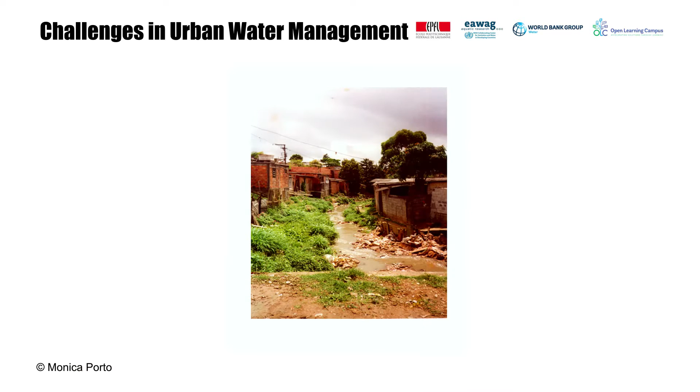Economic development and rapid urbanization dramatically increase the demand for water for municipal, domestic, industrial, agricultural, energy, environment, and recreational uses. Water pollution is increasing in developing countries' cities due to rapid changes in land use patterns, inadequate wastewater collection and treatment, poor solid waste and stormwater management, and aging infrastructure.

Climate change imposes additional stress on urban water sources due to increased variability and uncertainty of both floods and droughts. Traditional approaches to urban water investments are often fragmented and frequently unsustainable since they generally do not take into consideration the multiple dimensions and cross-cutting issues of urban water management.

Integrated urban water management, or IUWM, is a flexible, participatory, and iterative process which integrates the elements of the urban water cycle, such as water supply, sanitation, stormwater management, and solid waste management, within the context of a city's land use, urban development, and river basin management, in order to maximize economic, social, and environmental benefits.

IUWM offers a holistic way of undertaking strategic planning by considering the management of competing water uses at the level of the watershed, while recognizing the needs of the city as well as those upstream and downstream users.

IUWM takes into account the needs of all users within the basin, while working across vertical and horizontal administrative boundaries in order to overcome the traditional fragmentation of the urban water cycle, as well as to allow the consideration and integration of interdependent sectors, both urban and related sectors shown in green, and the different water subsectors shown in blue.

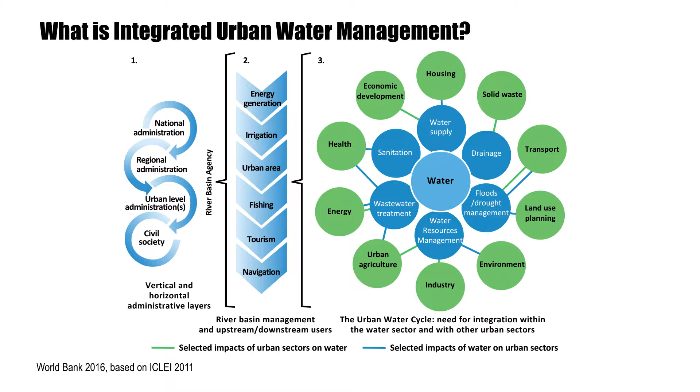International experience shows that the transition to an integrated urban water management approach is an incremental process triggered by one or several drivers that could be social, such as population growth and rapid urbanization, economic, for instance, when there is an urgent need for livable space, or environmental, such as water quality issues, water scarcity, or extreme climate events.

Cities in developed countries have transitioned through these phases, motivated by social-political drivers. Fast-growing cities in developing economies could leapfrog some or all of these earlier phases so that they can become water-sensitive cities more quickly, thus avoiding the mistakes that developed cities made while following this path.

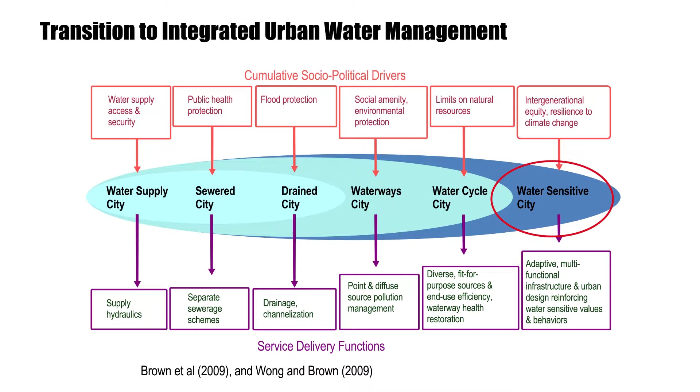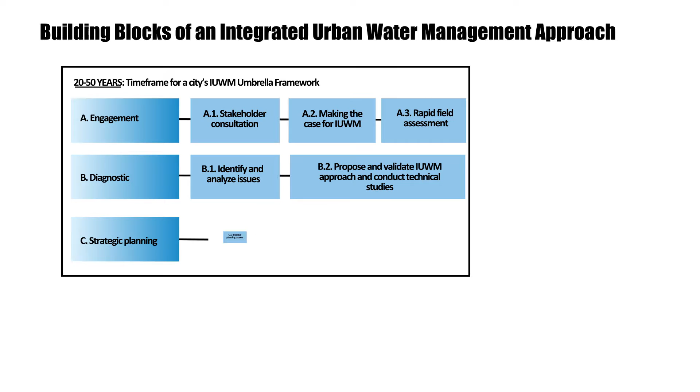We will now present practical guidance on building blocks and potential activities that may be considered when engaging with a city under an integrated urban water management approach. The activities listed are to be taken as general guidance, as their application in each case will vary depending on local conditions and drivers, as well as on the city's experience in applying an integrated approach, the level of interest of its key stakeholders, and their capacity.

Assessments undertaken using an integrated urban water management framework should include the evaluation of urban and water investments over a longer-term period of 20 to 50 years. In line with this long-term strategic planning, specific investment projects and programs can be designed and implemented that may deal with a smaller number of complementary urban and water interventions.

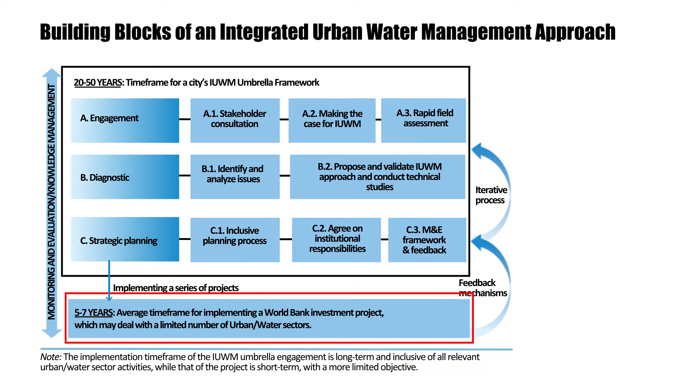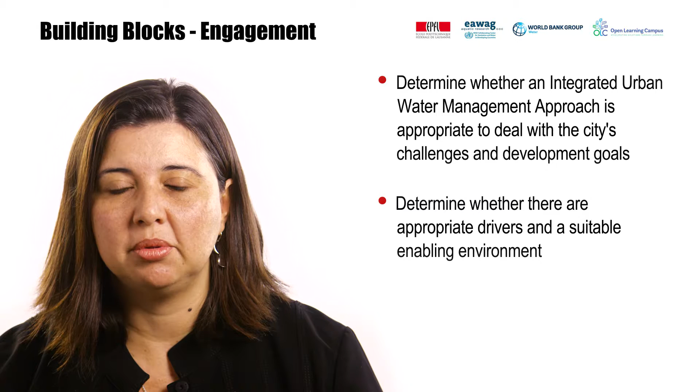The main objectives of the engagement phase are to determine whether an integrated urban water management approach is appropriate to deal with the city's challenges and development goals, and to determine whether there are appropriate drivers and a suitable enabling environment for embarking upon an integrated urban water management planning process.

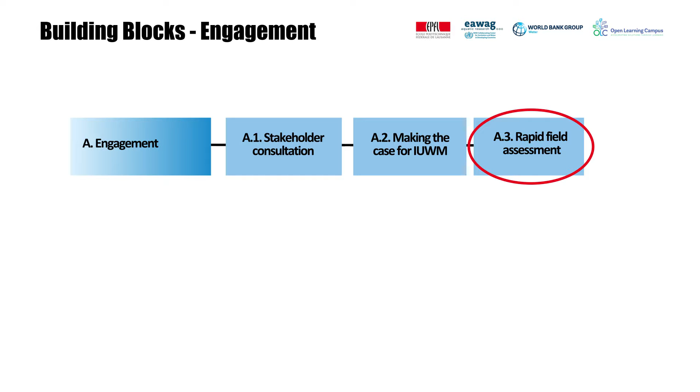Making the case for integrated urban water management with the identified stakeholders, and undertaking a rapid field assessment of the urban and water challenges in the city in order to refine the desk review analysis with the stakeholders to gain a better understanding of the water challenges the city faces and the processes and systems in place to deal with them.

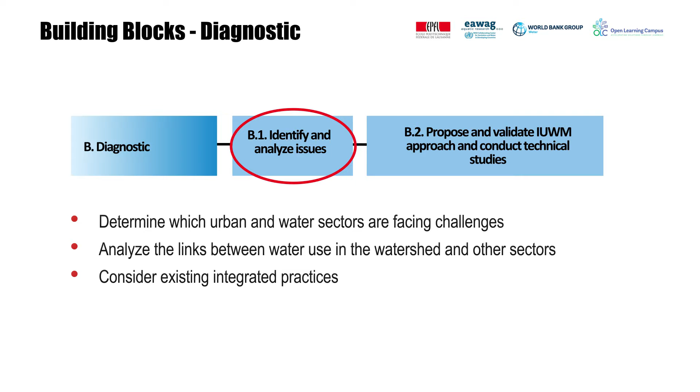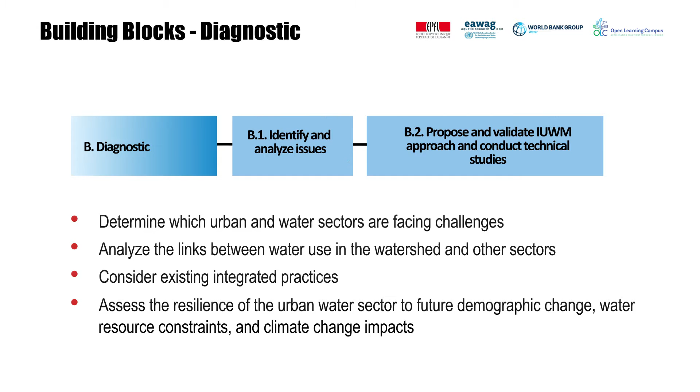Based on the data gathered and the stakeholder consultation carried out during the previous phase, the main objectives of the diagnostic phase are to determine which challenges urban and water sectors are facing or will face, analyze the links between water use in the watershed and other sectors, including those listed here, consider existing integrated practices or lack thereof, and assess the resilience of the urban water sector to future demographic change, water resource constraints, and climate change impacts. It is important to look not only at the data, but also at the modus operandi of the involved institutions.

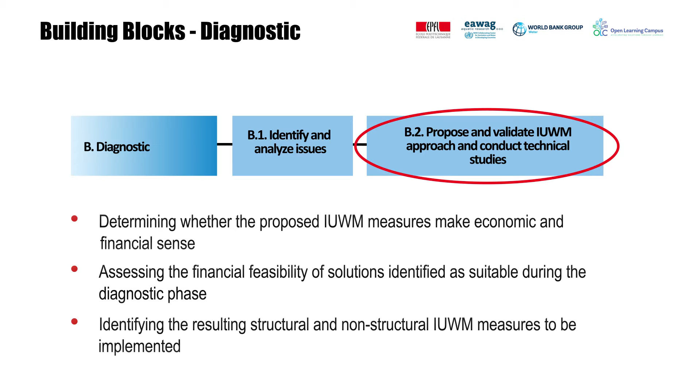Technical studies should be carried out next with the objective of determining whether the proposed IUWM measures make economic and financial sense, assessing the financial feasibility of solutions identified as suitable during the diagnostic phase, and identifying the resulting structural and non-structural IUWM measures to be implemented, where structural measures are the infrastructure interventions and non-structural measures cover the regulations, legal frameworks, tariffs, and education and capacity building. A number of technical studies will be required to inform the next phase of strategic planning, including those listed on the screen.

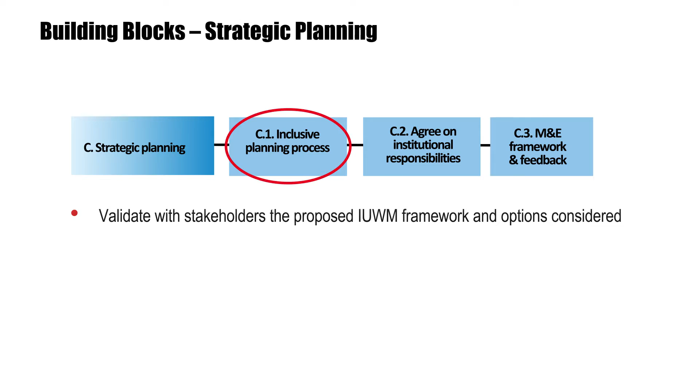The objectives of the strategic planning phase are to validate with stakeholders the proposed IUWM framework and options considered, clarify institutional responsibilities for implementing the proposed solutions, put mechanisms in place to manage and share data across sectors and institutions, and develop and apply an appropriate monitoring and evaluation framework for the strategic plan.

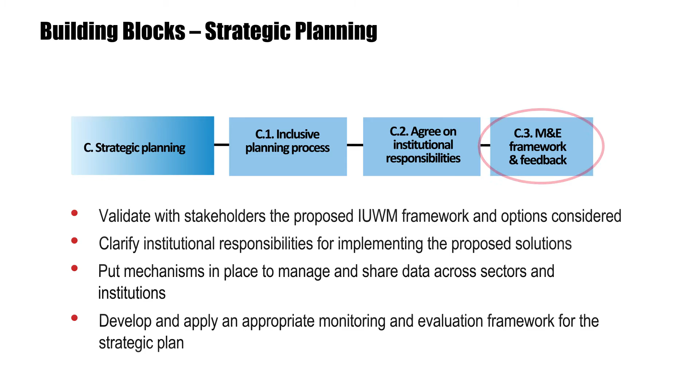Once stakeholders have decided to move forward with an IUWM approach, a vision can be developed for the long-term integration of urban water management in the city to include the following elements: agreement on a set of proposed outcomes for the city, on institutional responsibilities and cost-sharing arrangements, milestones, and a monitoring framework for tracking the implementation of activities to reach the proposed outcomes, and mechanisms for review, feedback, knowledge management, and course correction.

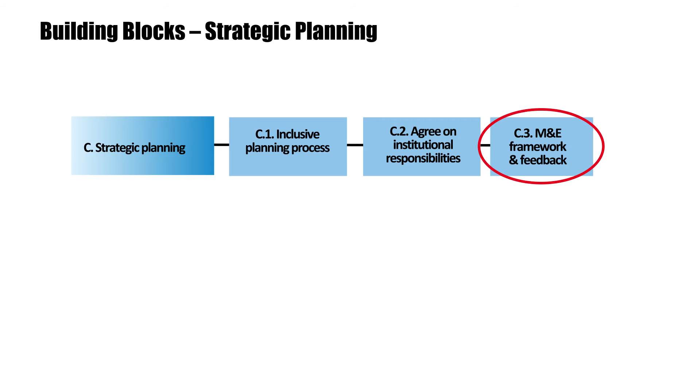To summarize, in this module, we have seen that integrated urban water management is about improving the way water resources and related services are managed across the urban water cycle by promoting resource diversification, system efficiency, and conservation, while taking into consideration all water users in the city and in the wider catchment through broad stakeholder participation.

IUWM offers a holistic approach to strategic planning and implementation, which considers the management of competing water uses and urban service provision in the city, in the context of the watershed, while recognizing the water needs of the city as well as those of upstream and downstream users.

An approach to integrated urban water management encompasses initial engagement and mapping of stakeholders, the undertaking of diagnosis to analyze the city's urban and water challenges, strategic planning to identify objectives and outcomes, priorities and costs, institutional responsibilities, monitoring and evaluation frameworks, and feedback mechanisms.